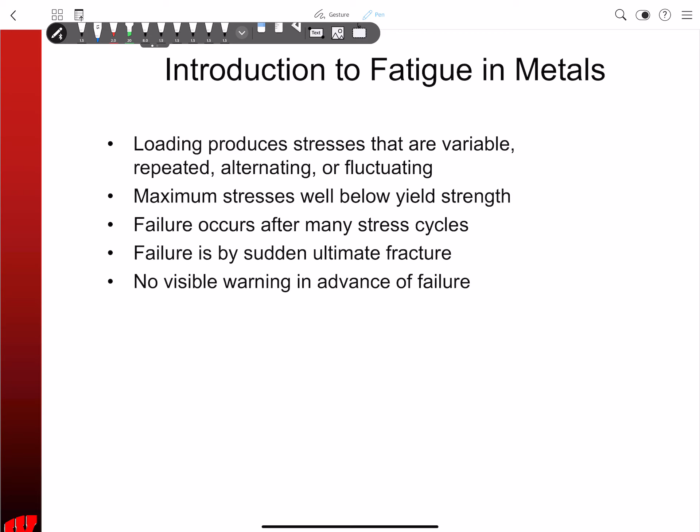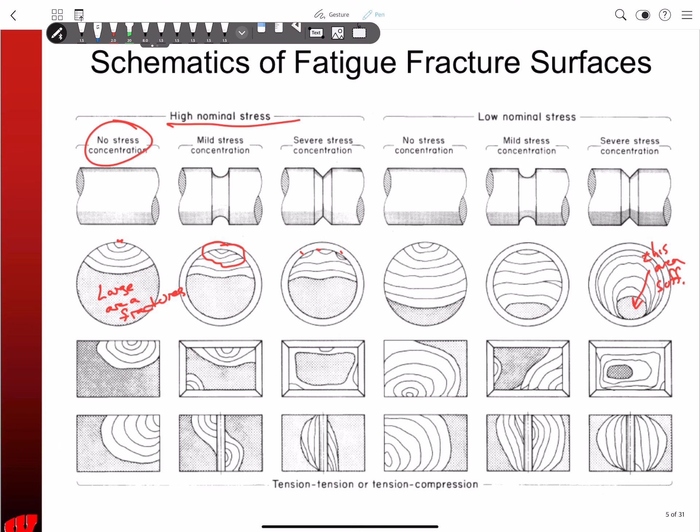Stress concentrations matter, we'll talk about those today. Here's an example: a little tiny crack starts, then spreads across the whole cross section. You can examine the failure surface and figure out a lot about what happened. So if you go to court, they'll figure out what you did wrong.

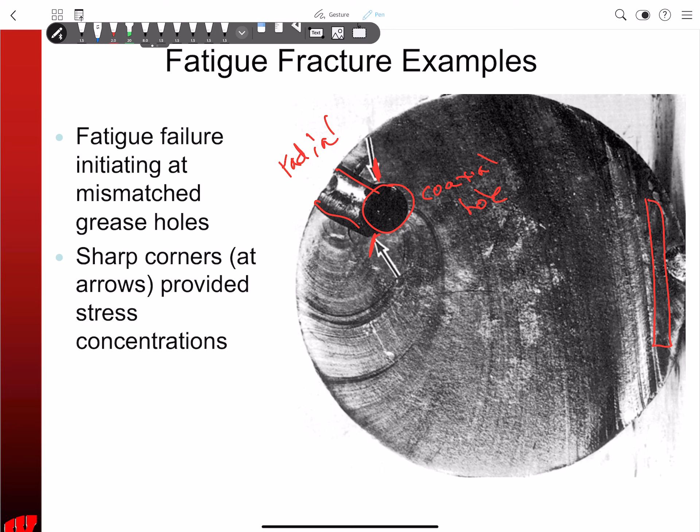A little stress concentration, a little crack started at an inclusion, a stamping, on a forging or a casting. Some waves caused a fatigue failure. An axle caused a fatigue failure, killed a bunch of people.

We're going to take the easiest approach to this, which is the stress life method. It's the least accurate, but it's the most traditional and it's the easiest, so at least we know what's going on. I can't stress enough, in your industry, in your field, you're going to need to use the technique that they use, but this is the general concepts.

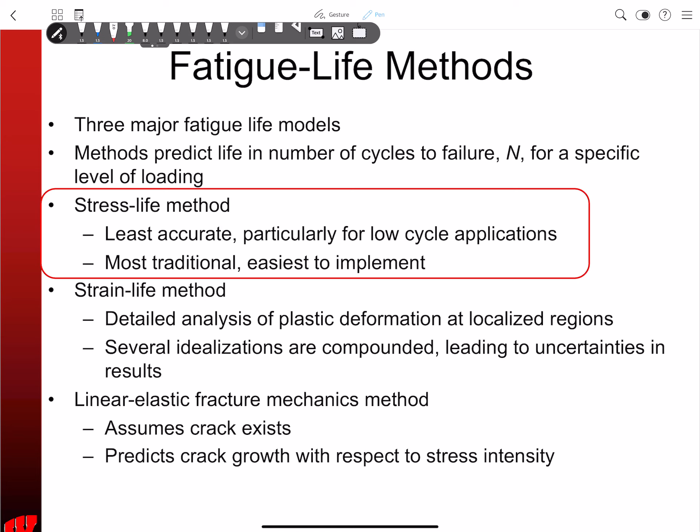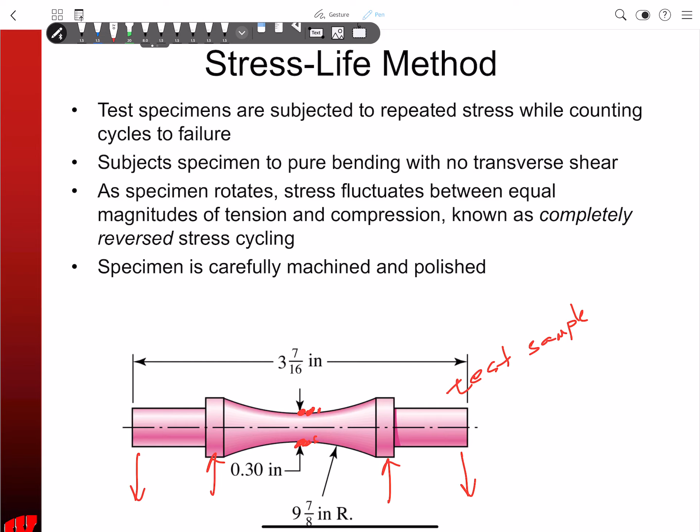We run these, we get it as a material property. Fatigue strength is a material property based on very carefully contrived laboratory experiments. That gives us a material property by loading this thing in 4-point bending, pure moment, and then spinning it until it fails.

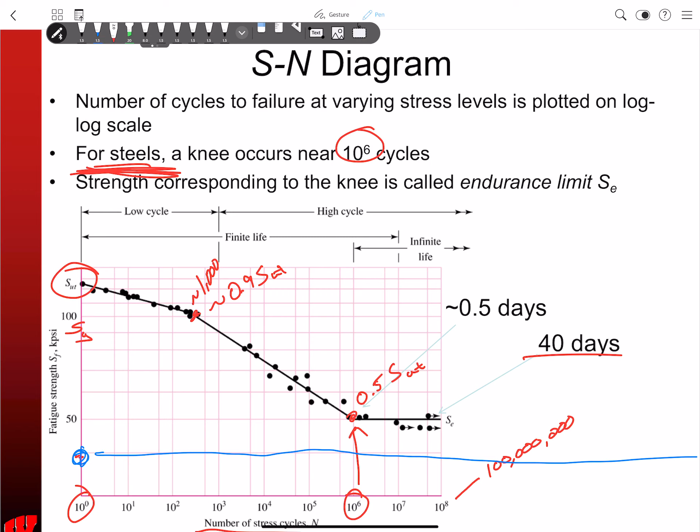Let's see, the SN diagram. This kind of shows on a log-log scale that there's a somewhat linear relationship between the stress and the number of cycles until failure. And then it's linear in this region from the 10 to the 3 strength, which is right up here, all the way down to the endurance strength, which is right down there.

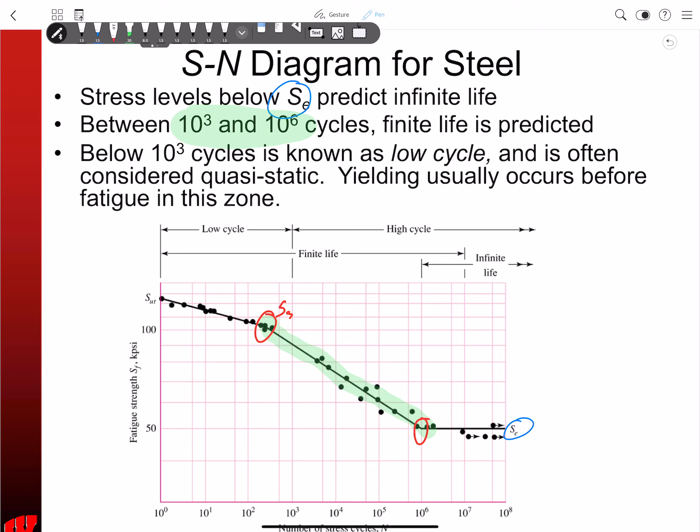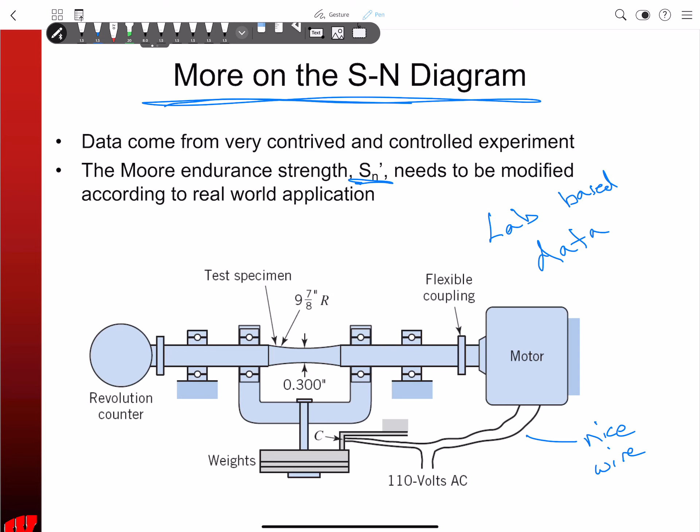So sometimes this is called S3, and then this is SN down there. And that's linear there, it comes from this contrived experiment again. We call that SN prime. SN, actually this should be SN prime here - that's a mistake, so let's change that to SN prime.

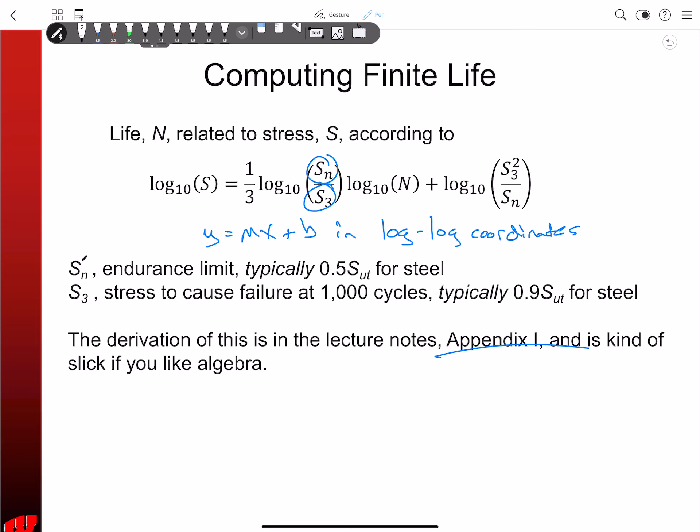All right, the endurance limit, typically 0.5, half of the ultimate tensile strength. And then we can figure out the life and the stress based on this linear equation here. SN prime comes from a very carefully contrived lab experiment.

In the real world, with real geometry and real loading and real surface finish and necessary reliability, we have to adjust these. And I didn't really make a good enough point of this the other day, but these are all less than 1.

These are all, typically, less than 1. So when we multiply these things together, the stress, the endurance strength, the actual endurance strength - so this is actual, and this is lab - is much less than the lab strength.

And then load factor - yeah, I didn't like this slide, I'll have to make a short video about this, I think, with some props. Well, so basically the load factor is due to the fact that the laboratory experiment comes from pure bending, which is maximized at the surface, and it's a normal stress, and it's fully reversed.

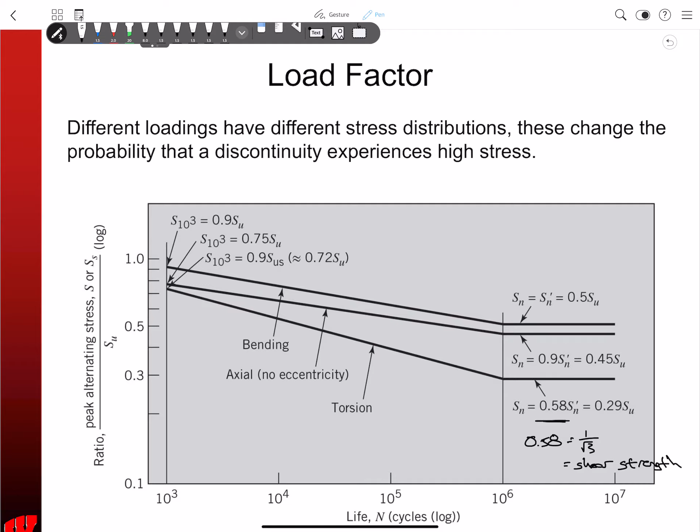If it's axially loaded, if that stress is axial, that stress applies everywhere, not just on the surface, so that lowers our endurance strength a little bit. If it's in torsion, that's shear - we know that's quite a bit less, and we've seen this 0.58 before. The 0.58, I believe, equals 1 over the square root of 3, which is the shear strength from the distortion energy theory.

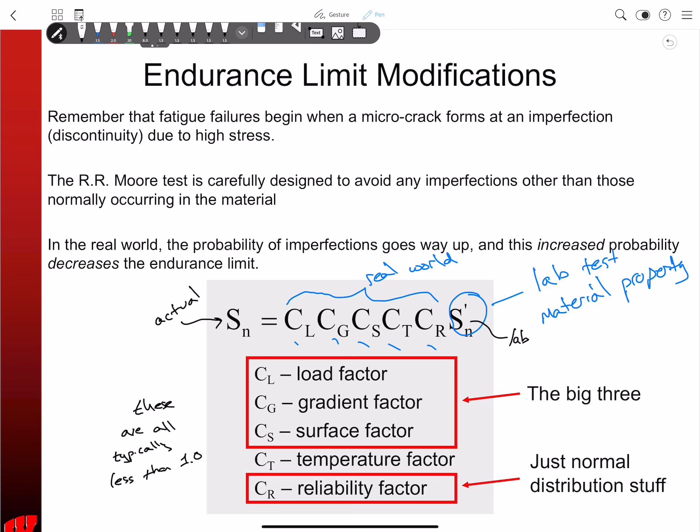Okay, so what else? Oh, the size factor. Remember, even though there might be a really big shaft and a really little shaft, they're made out of the same material, which means the crystal sizes are the same. So the number of crystals exposed to a high stress increases, so there's a much greater chance in the bigger shaft that a micro crack will form. Hence, the Marin factor, or the endurance limit modification factor, for a large shaft is less than it is for a small shaft.

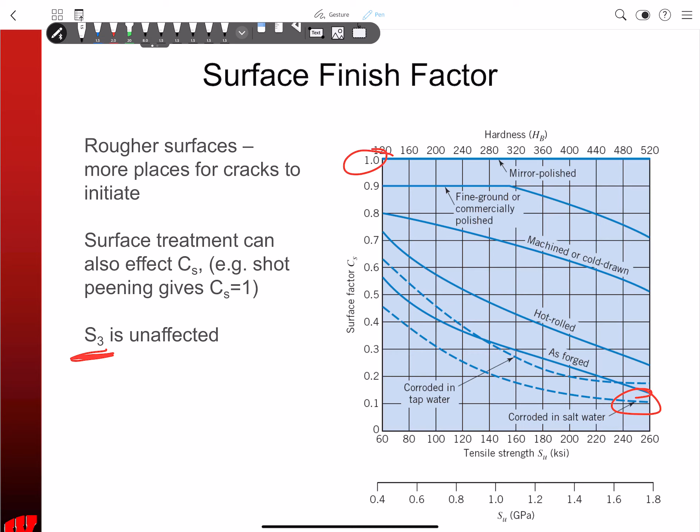All right, and then surface finish - this is probably the biggest one, or certainly the most impactful. And reliability factors based on normal distribution stuff. It's not just made up, although the table that we're going to see makes it look like it's made up.

And then here's a summary of all the Marin factors. The surface factor comes from a plot. The rest of them are kind of neatly summarized here. This isn't the only way to do it - there are more elegant or more complicated ways to do it, but this is pretty good, so we're going to stick with this.

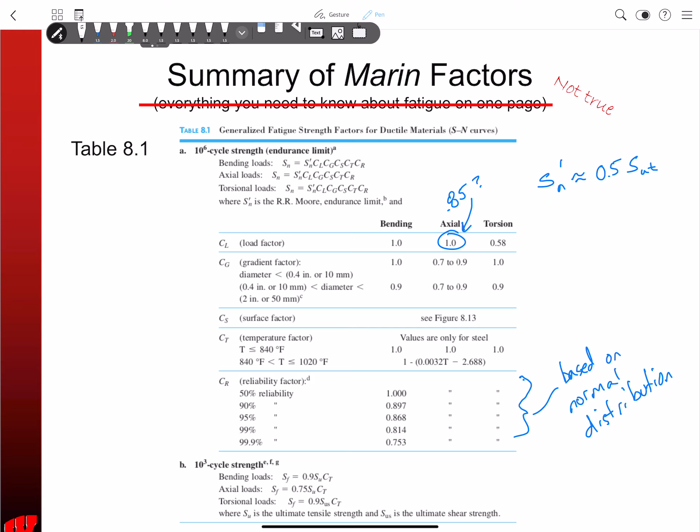All right, now that was a long review, but I think worthwhile. Now let's look at mean and alternating stresses.

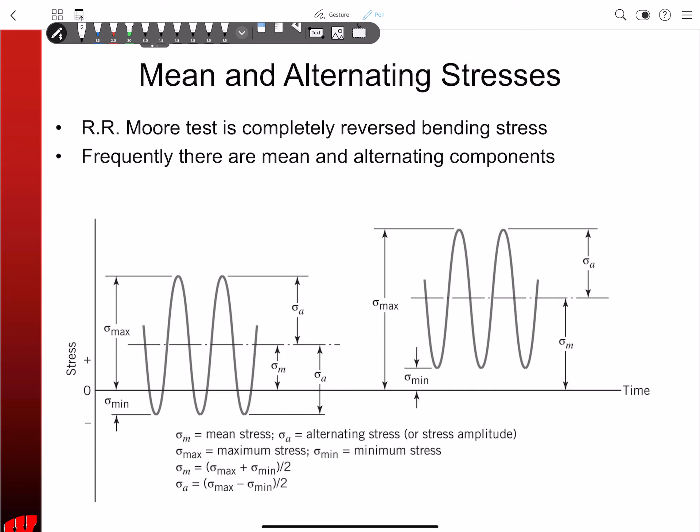In the R.R. Moore bending test, they're fully reversed - it goes from full compression to full tension to full compression to full tension. If I have something that's not loaded fully reverse, such that there's a mean stress - so this is the mean stress, and this is the alternating.

What's an example of something that has a mean and alternating stress? I can't think of one on the spot, but say like a swing - the chains on a swing set. Let's do that, I'll write it down.

Example: chains on a swing set. What would that look like? Well, they're never in compression, so they go from 0 when there's nobody sitting on it, to maximum when they're swinging, and then back to 0, then maximum, 0, maximum, like this.

So a kid on the swing set would be here, and then empty would be there. This is not fully reversed loading - this is a repeated loading.

So we have the mean stress, which would look like this, sigma mean, and then this part up here would be sigma alternating.

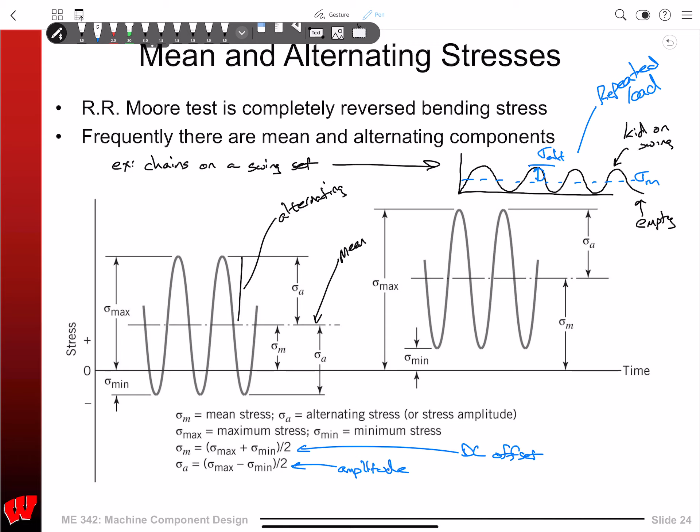This here is called repeated - not fully reversed, a repeated load. It goes from 0 to max to 0 to max to 0 to max. Hopefully that makes sense.

Now, apples to apples, oranges to oranges. Many of you did some sort of problem back in high school algebra class where you've got a machine that can make so many jelly donuts and then so many Bismarcks, and you have to maximize your profit - one machine does this part, another does that part. I love those problems, I don't know why, I just thought they were great.

But both stresses, mean stresses and alternating stresses, affect the life of our part. So what we do is compare the mean stresses to the ultimate strength, and compare the alternating stresses to the endurance strength.

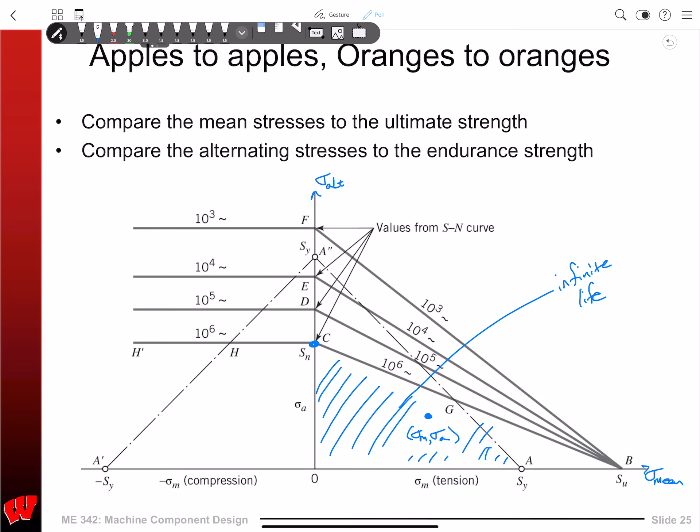It's important that we compare mean stresses to ultimate strength and alternating stresses to endurance strength. So this is another way to look at the same data - these are all experimental data. It's important to note that this is 0 here, here's 0, and then here we have sigma equals SU.

This is sigma equals Sn. In compression, things tend to last forever - they never really fail. But what they do... okay, let's just leave it at that.

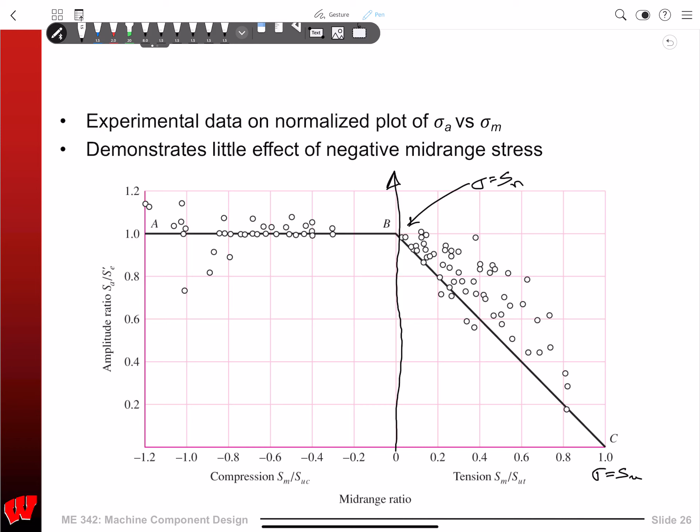I got a piece of debris on my iPad here. And so we discovered that if we plot the stress applied, or the combination of stresses, and run it to failure, we discover it does actually fall on this line. Anyway, all models are wrong.

Some are useful - there's a bunch of different ways to do this. First of all, we're mainly concerned with yielding, so we need to avoid that. There are multiple models we could use: this ASME elliptic line, the Gerber line, the modified Goodman line.

All these different models plot mean stresses and alternating stresses and compare those to infinite life. But we're just going to use the simplest one - thank you very much, this is the one we're going to use, the easiest one.

So first of all, we're using the easiest model, the stress life model, and within that subset, the easiest one, the Goodman line - just a straight line from endurance strength to ultimate tensile strength, versus some of these elliptical lines. This one's kind of nice, actually.

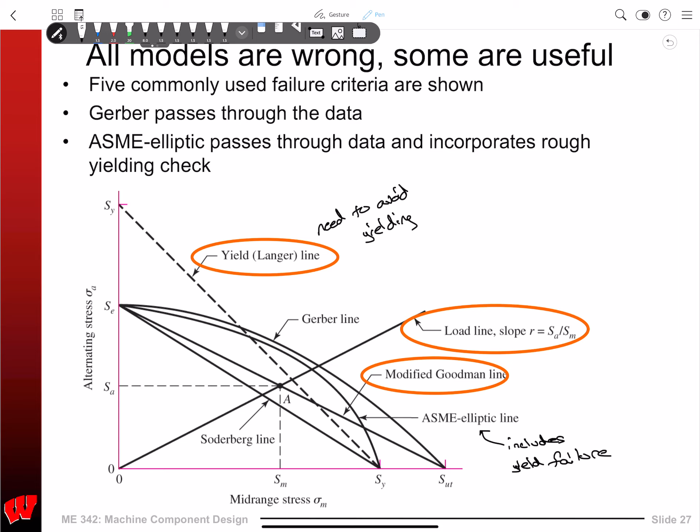This includes yield failure. Maybe in future semesters I'll take a crack at that one. But Goodman just makes the math so easy - I want to test your engineering skills, not your math skills.

So anywhere in here - let's do this in green - this is all infinite life in here.

Right, so that's infinite life, no yielding. And this over here would be yielded, but no fatigue failure. Now you might say, that's dumb. Why'd you make a part that can survive the repeated loadings or the alternating stresses, but it yields? We're going to look at that when we look at bolts and fasteners.

I don't care if a bolt yields a little bit, as long as it's still holding. But we do like them to have really high tensions. We'll talk about that more later.

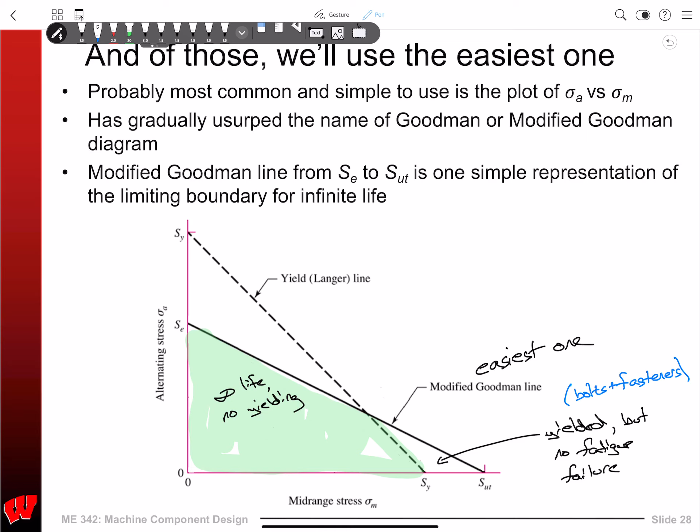All right, so there's a bunch of key equations. Remember, there's all these different models: Gerber, ASME elliptic, and then the modified Goodman. We're only going to look at this one, and this is a super easy equation to use.

And this here is the safety factor against infinite life. You just plug the stuff in. You know your alternating stress, you know your endurance limit, you know your mean stress, you know your ultimate tensile strength. If you know all that stuff, you can get your safety factor. Or, obviously, you can solve for any one of these if you know the others, which is what you're going to have to do for your project, and I think even one of your homeworks.

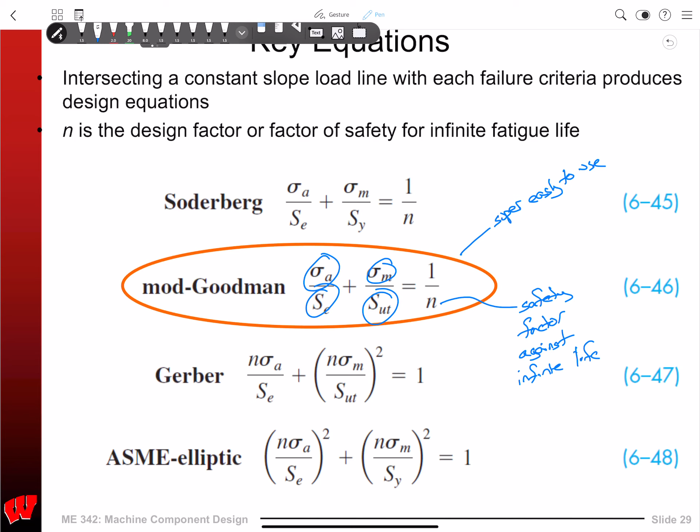All right, so remember at the very start of the last lecture, we said stress concentrations matter, right? In static loading, in ductile materials, we don't worry about them because some of the fibers will stretch, they'll yield, and then the load gets picked up by the neighboring material. In brittle materials, that doesn't happen. It doesn't yield, it fractures, and then that fracture propagates. So stress concentrations in static loading in brittle materials is very bad.

What about ductile materials in fatigue? They're bad, but they're not that bad. So let's take a look. This is KF, called the fatigue stress concentration factor, and KT is theoretical, from tables and plots. So what is it that makes the fatigue stress concentration factor, or in general a stress concentration factor, bad? It's the fact that it's bigger than 1.

All right, so what do we do? We take the 1 away, so we have this KT minus 1 — say the stress concentration factor was 1.6, well, we say, all right, it's just the 0.6. The 0.6 is the part that really matters. We multiply that by this Q, which is notch sensitivity.

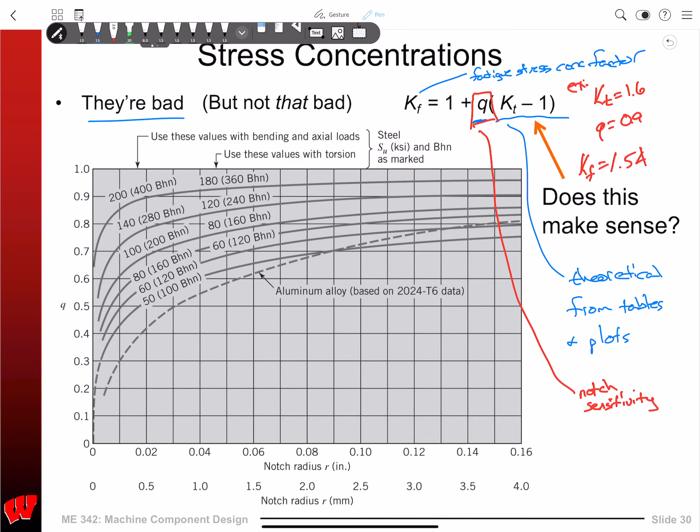Now, this is for normal stresses. There's another one for shear stress. And both of those are on the same page in your book.

So, general procedure for fatigue failure. Find the principal strengths of your material — what's ultimate tensile strength? And you got to go through the process with all these Marin factors and figure out what the endurance strength is. Find the stresses involved. We're going to use distortion energy to find an equivalent stress.

Find the theoretical stress concentration factor. So we need to do that — I need to make a comment here. So I need K, for both sigma and tau — so we have shear, normal, and shear. Find the notch sensitivity for the material, for normal and shear. And then we multiply those, or then we get the KF, from equations: KF equals 1 plus Q times KT minus 1.

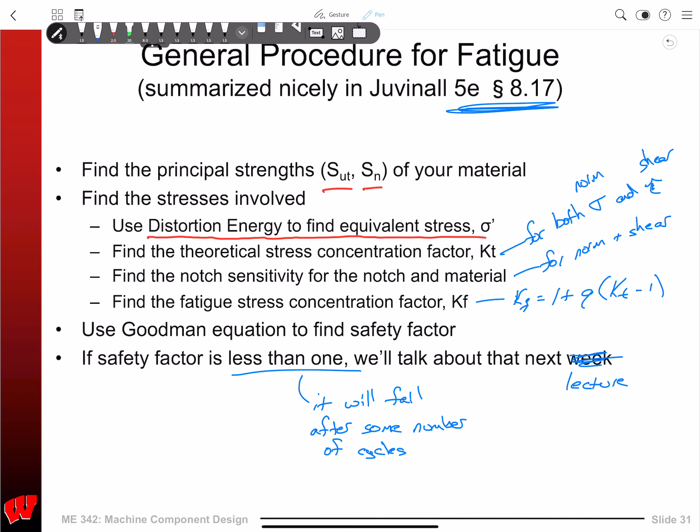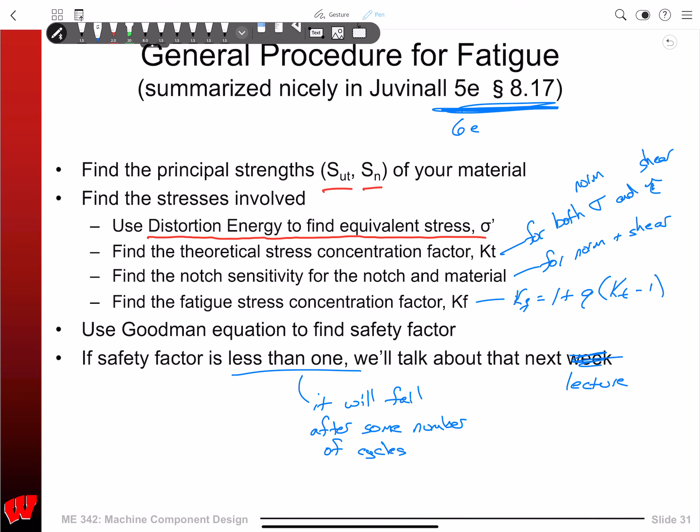Okay, so you've got some homework to work on that I think you're able to do, and this is tough stuff. You just got to go through the process. But again, it's the same in 6E too. At section 8.17, it kind of steps you through the whole process. There's a lot of good examples. So watch Alston's example videos. Try the homework. Ask me during office hours. You just got to practice this stuff. Okay, I think that's it. Yeah, that's it. We'll see you later.